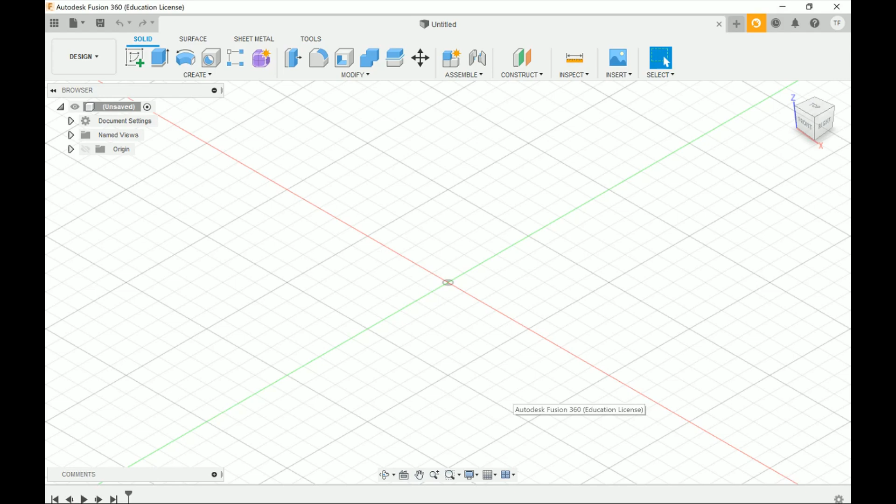We'll get right into it. So here's the blank sheet for Autodesk Fusion 360. This is how whenever you open it up, this is the start out screen. So this is what I use to design basically about anything I'm making, and then I convert it, manufacture the G code, an NC file, and I put the G code into the Candle program, and then it goes straight into the machine. So I run everything off my laptop.

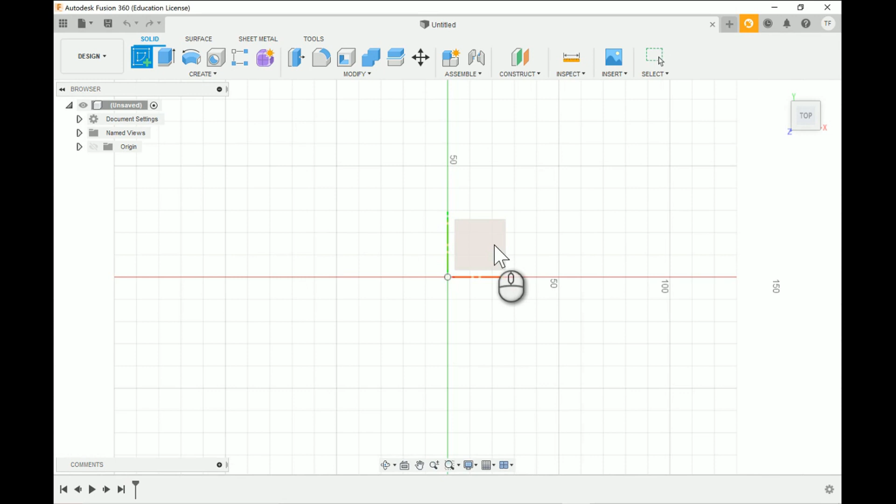So what I normally do, I'll start out over here in a top view, and then I'll go over here and create my sketch. Whenever you hit create sketch, you have to point out which plane you're going to be in, so I use this top plane, and then you're right into your sketch palette. You can do just about anything in the sketch palette.

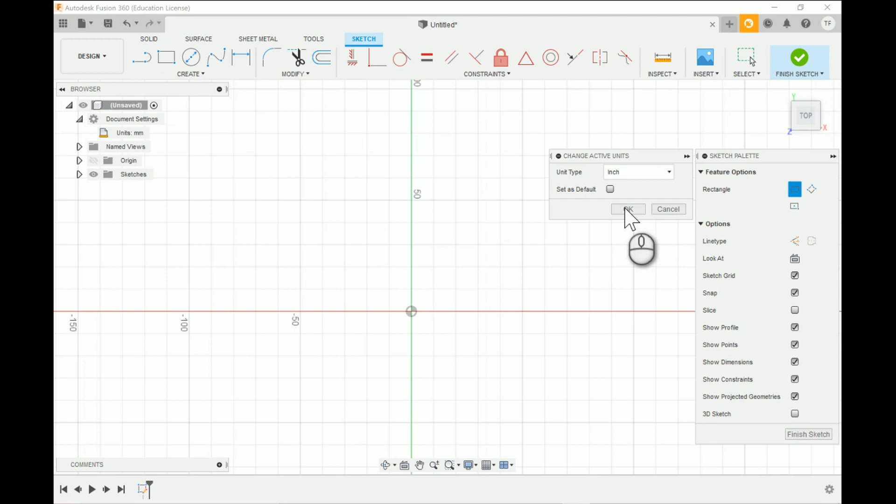In the document settings, you can use the units. There's all sorts of units, you can do all of these. A lot of times I do millimeters and inches. We'll set inches as our standard for now.

So we can create a rectangle here. I'll start out here in the main axis, and then we'll just make a 2 by 4.5, I guess. Okay, so now we have a rectangle, and what we want to do is make this into a shape.

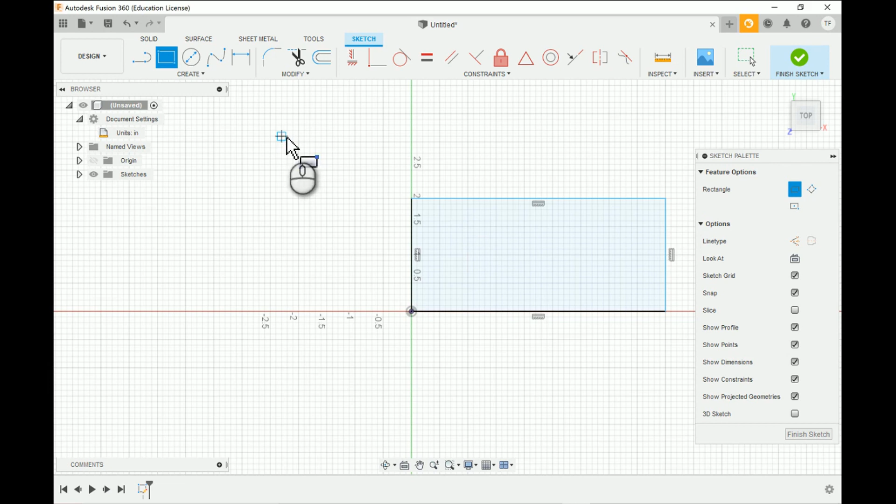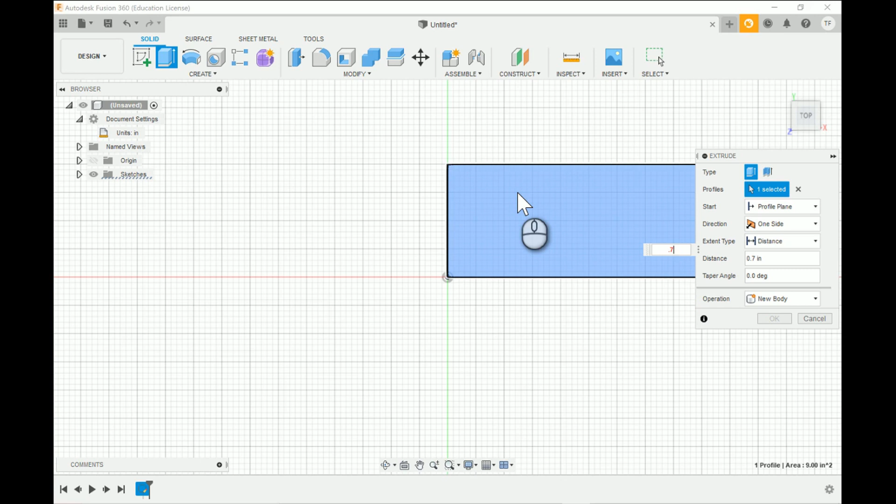So we'll go over here to solid, and we'll extrude this shape. Basically what that does is it stretches it out and makes it an actual object. So let's go 3/4 of an inch, 0.75, and then hit enter, and then we should now have a fully rectangle cube.

So we'll go back here to the top. Now let's say we wanted to drill a couple holes in this block. We'll create another sketch, click on the top plane, and now we are sketching on the top surface of this object.

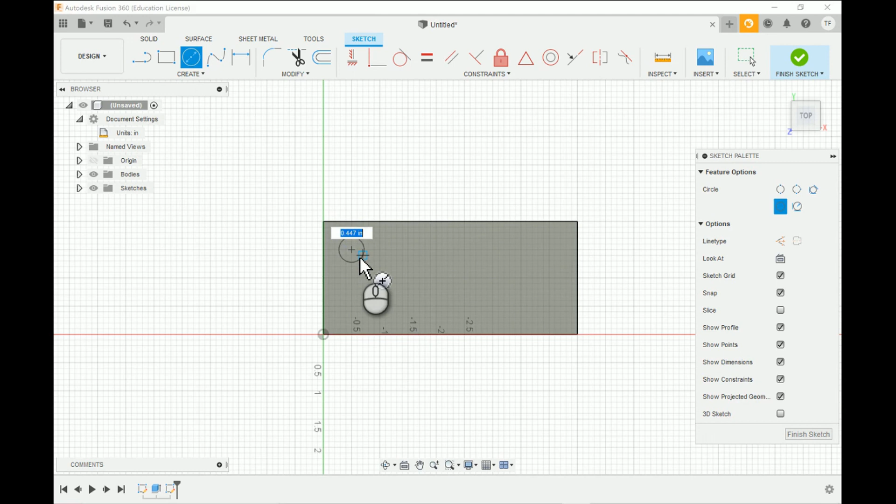So we can take a circle, put it at whatever point we want to, let's go here. Then we can go with a 1/2 inch hole. So now we have just a flat 1/2 inch circle, there's no hole, there's just a circle right now. So we'll escape there, and then we'll go back to our top.

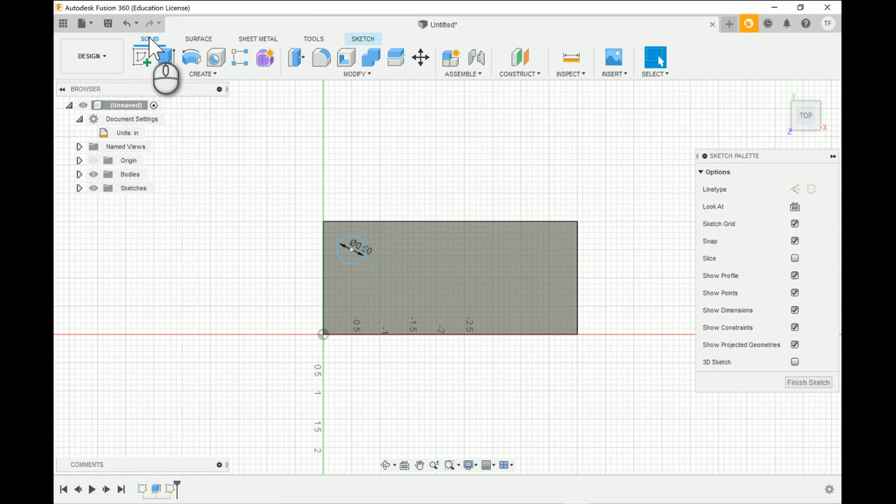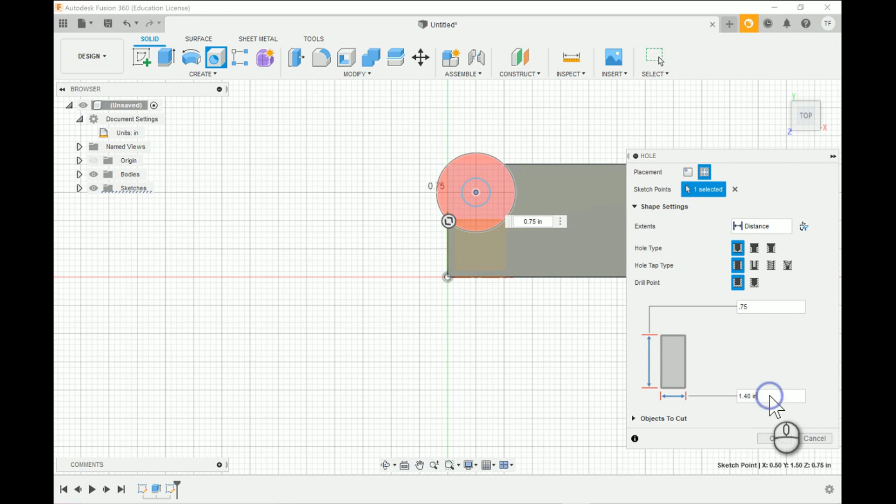To make a hole, go back over here to solid, and then we hit the hole function. Now that we have the hole function selected, we can go over here and select our holes, so we'll click on that one. There's all sorts of different types of drill points and everything, so we'll go with just a normal hole, and instead of a rounded, we'll go with a flat bottom hole. Let's say we want to go all the way through the material, so we'll do the same depth as our material, and make sure our hole is a 1/2 inch, just like the circle we drew, then hit OK, and there's your hole completely through the object.

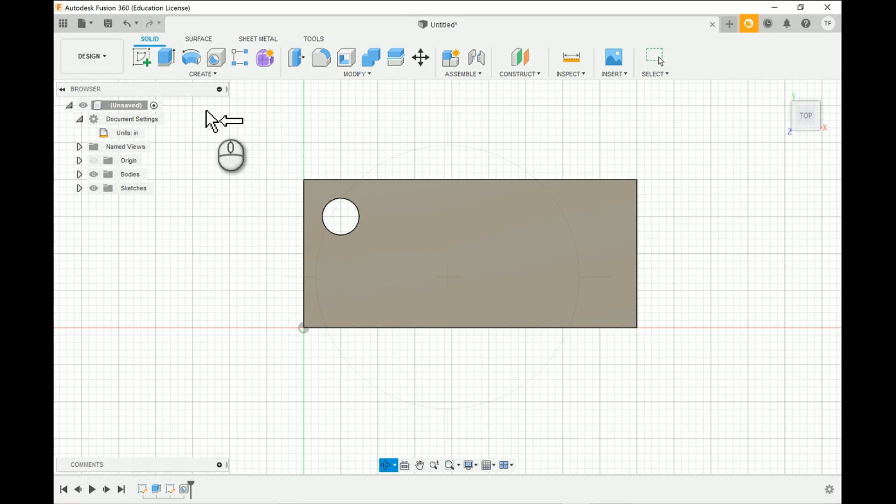Okay, so now if we want to go, say we didn't want to have a hole all the way through, say we would rather just have a partial hole, we can make another one here. And then once again we do the same thing, and this time let's only go 1/4 inch in. We got all of our settings the same, so we hit OK. Now we only have a partial hole.

So, many different ways to do many different things on here. That's what I do for a lot of my game boards and things that I make. Do shallow depth holes and things.

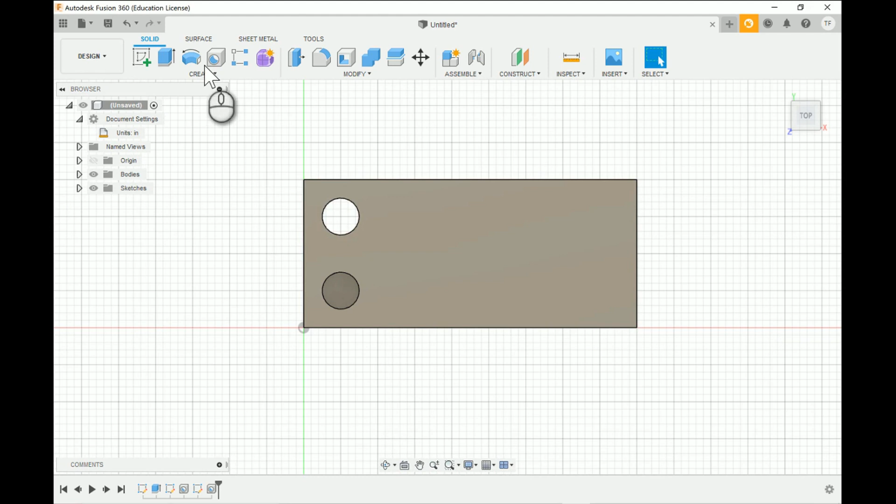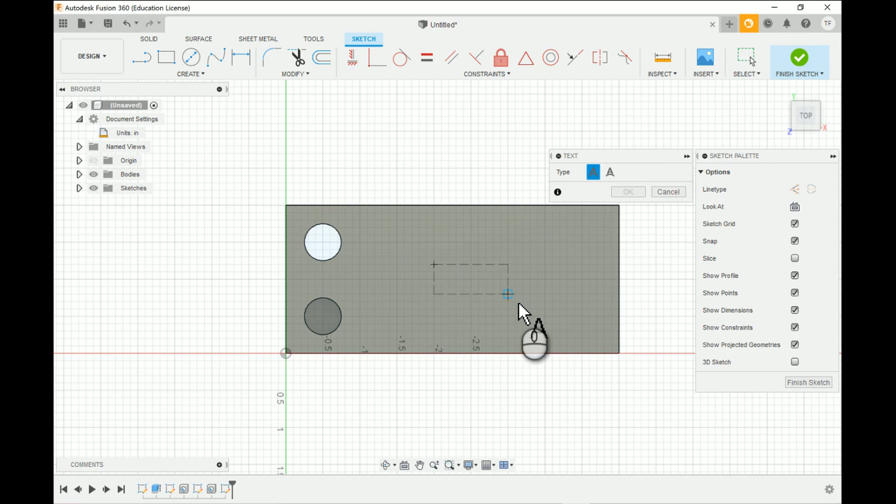In sketching, you can also do text. So if you like to engrave stuff, if you want to cut a big old rectangle out or shapes or whatever you want. So if we wanted to engrave text, we can just make a text box here. So then we can just put whatever in here.

And then there's tons of fonts. I do know there are ways to insert your own fonts. You can download fonts off the internet and put them into the program as well. There's different types of fonts, certain fonts for different things, but we'll just go with the normal font for now. You can create the height, you can bold it, you can do about anything with it.

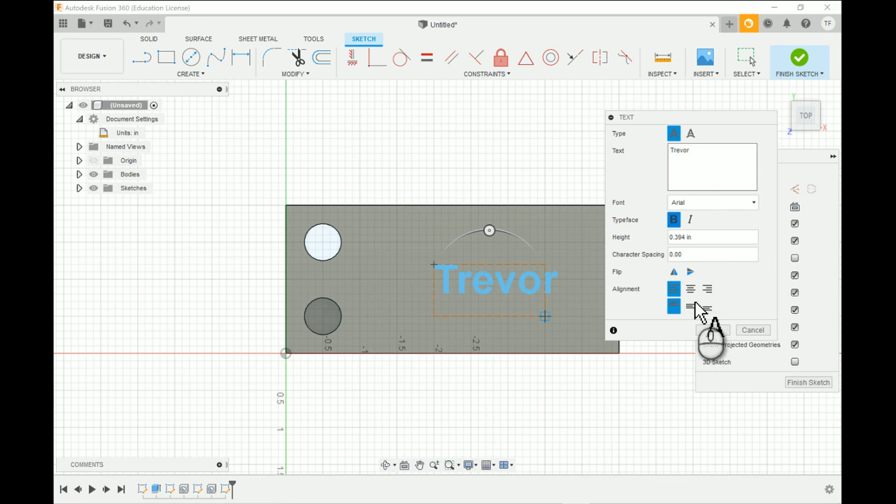So say we want to engrave. I guess we can go straight into manufacturing. So whenever you have everything you want to manufacture all drawn up and everything, after you get your design finished, you go over here to manufacture.

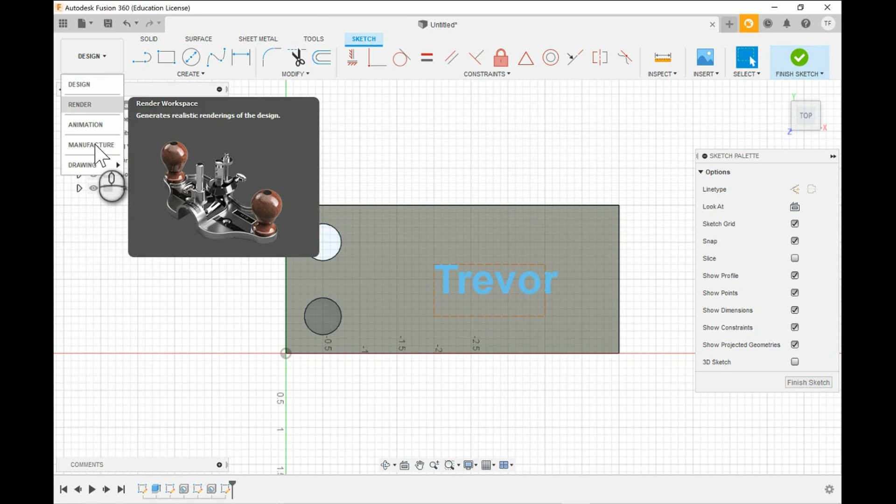And manufacture, you also have different units and things, different ways to cut. Most of the stuff that I do is 2D cutting and stuff. They also have 3D surfaces with lots of contours and things. Holes can be drilled using these drilling functions. Got smart hole recognition, different things like that.

For cutting and stuff, a lot of times I use like a 2D pocket, slotting, tracing. For text, I do engraving. So say we want to engrave, and we want to engrave just the letters. We go over here to our tool, and how I set up my tools, I create my own tools.

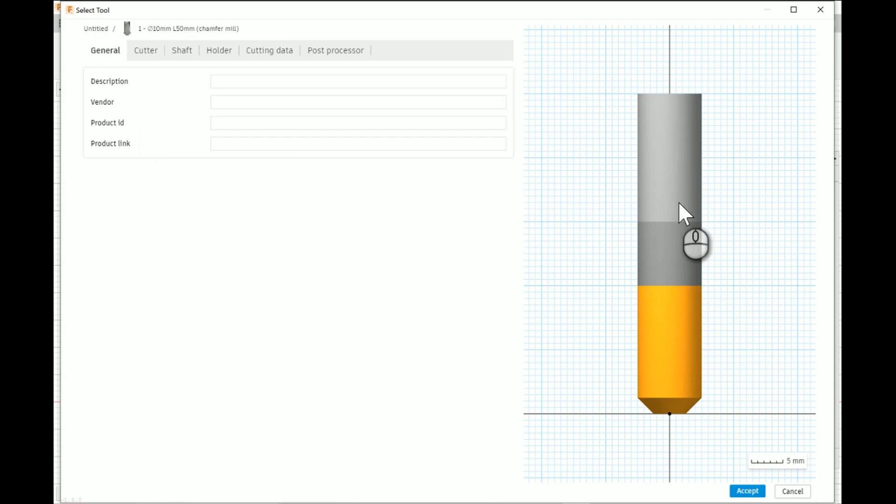So for a 30-degree V-bit, like the one that comes with the 300-watt spindle and stuff, they don't really have an exact tool preset in here for it. So what I do, I use a chamfer mill. So I set it up as a chamfer mill. This is what the stock chamfer mill looks like. So we'll edit the settings and stuff to make it look like our 30-degree V-bit.

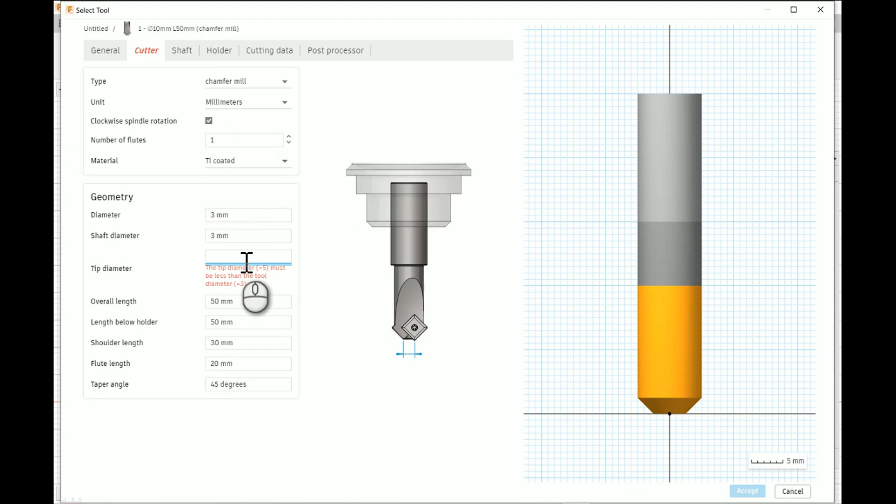So we'll go over here, we'll put one flute in. Material doesn't matter a whole lot, I just do Ti coated. The one with the machine is 3mm in diameter. Shaft diameter is the same. Tip diameter I put 0.01 in. Overall length, I can't quite remember, but I believe it was around 30mm. Length below holder, we'll go 15. Shoulder length 15. Flute length I believe was 6mm, and of course our angle is 30 degrees for the V-bit.

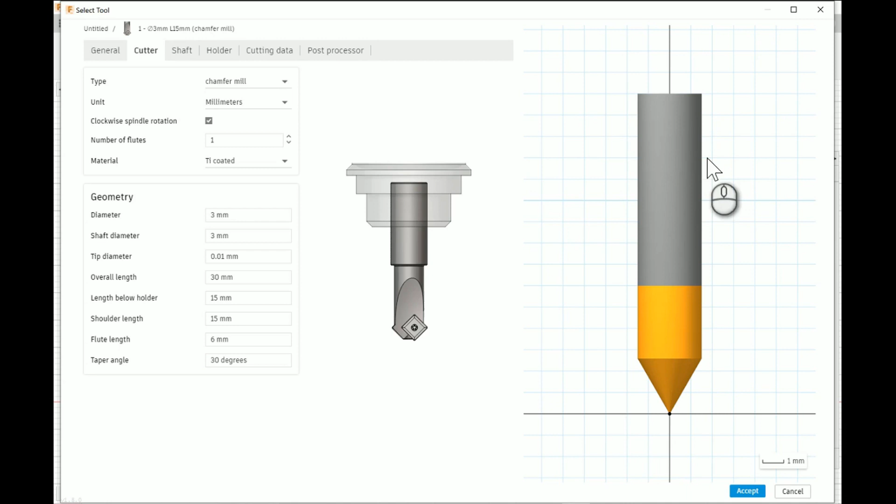So now you have your actual 30-degree V-bit, and this is what the program thinks it looks like, and it's plenty close enough to what the actual bit is.

So our cutting data, if you want the program to already know exactly what this tool can handle, you come over here and input the cutting data. For acrylic, I used 10,000 RPMs on the 300-watt spindle. I did a cutting rate of 1,000. My ramp feed rate, I slow it down to 300. My plunge, I do 300 as well. Obviously there's no coolant, so we'll come down here and disable that. And that's about it on the 30-degree V-bit.

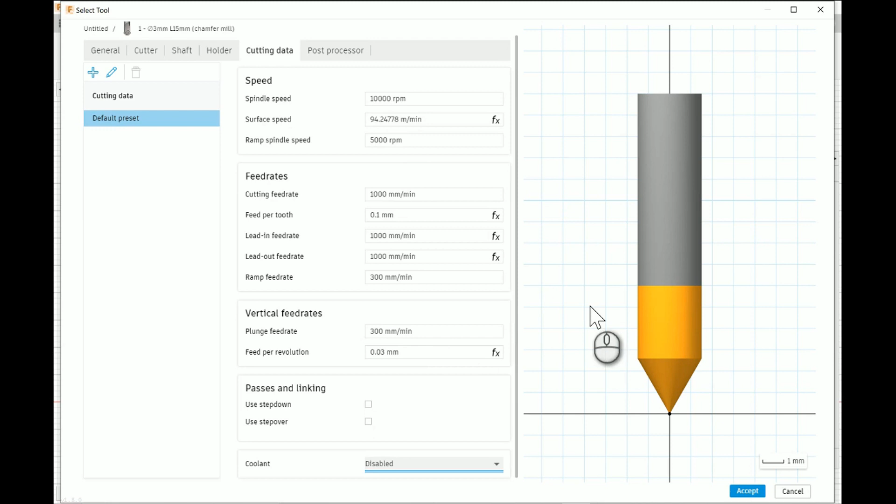So we'll go over here and we'll hit accept. And then here's our new tool. So we'll select that one. And then we'll come over here and you'll see the program already knows everything that this tool can handle. So it's already got the spindle speed, feed rates, and everything already preset over here.

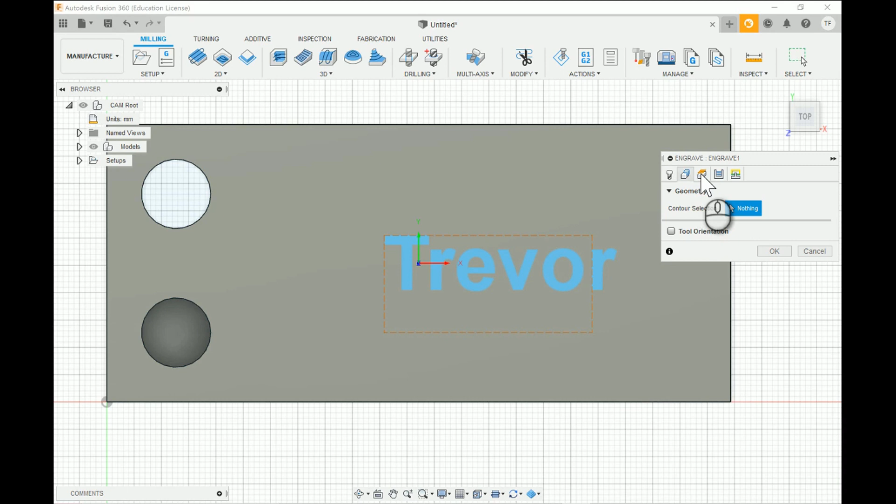So we go over here to geometry. We want to select our contours. So we select the lettering. So now it's got an outline of what's going to be engraved.

Clearance, that's a little bit of a tricky one for me. Depends on how high you want to, how deep you want to engrave your stuff. I have to play with that one a little bit, but you can see the different heights, the clearance heights, the retracting height, and all that. That's one that you kind of got to adjust depending on what you're engraving and all that.

And then it's good having multiple depths and stuff, depending on what you're engraving and things like that. Sometimes it's good to do multiple depths so you're not taking too much. But as far as engraving goes, most of the time you can get away with one depth a lot of times.

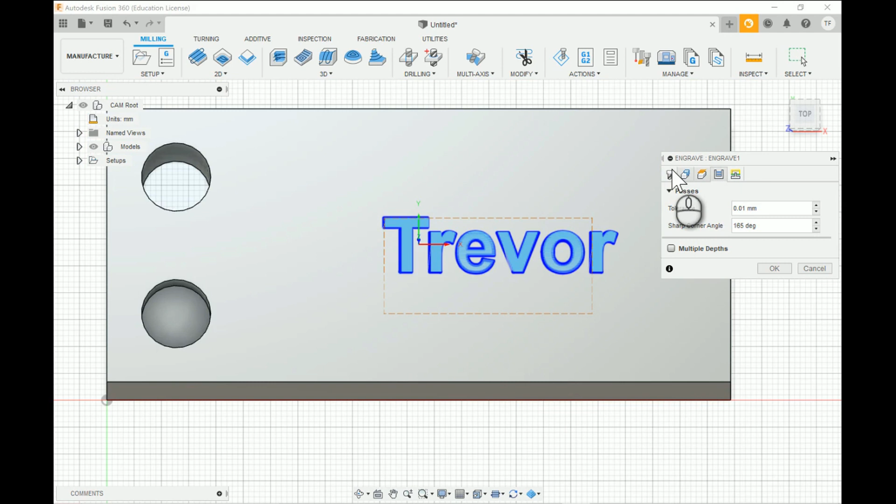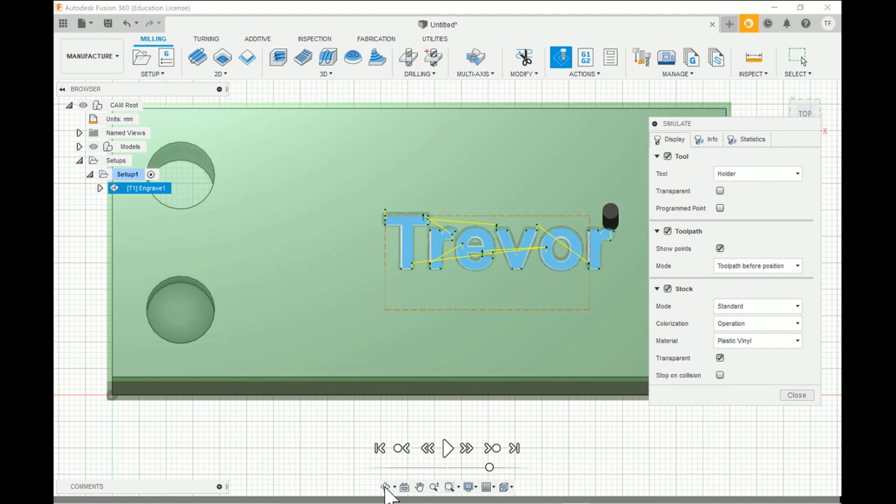So we'll have it set up, and then you can go over here and hit simulate, and then you can watch it engrave the entire thing. And that's about all there is to it as far as engraving goes. And you can kind of see a little bit of the 3D contour there, get a little depth perception there.

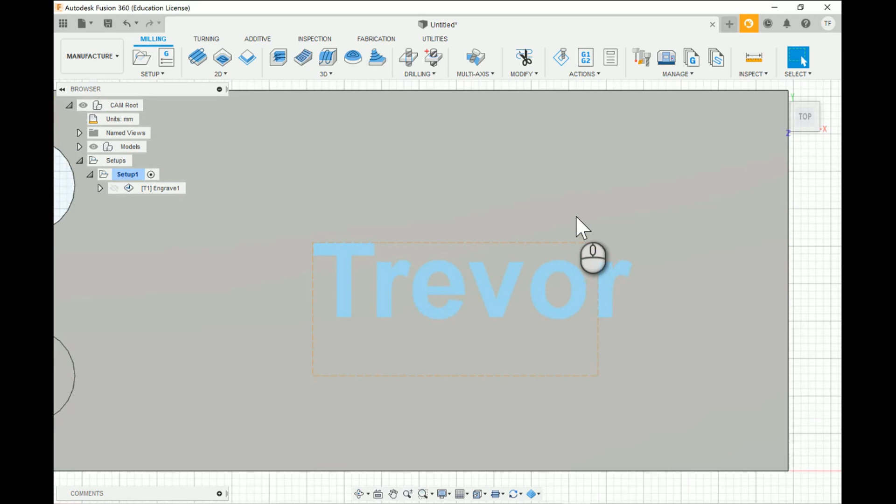As far as drilling holes, let me center this. So we'll go back over here to our holes. So one good thing about this program, they have a hole recognition function, so you can automatically recognize the holes, or you can go in here and select them manually. For the hole drilling, you can set up your own bit or whatever.

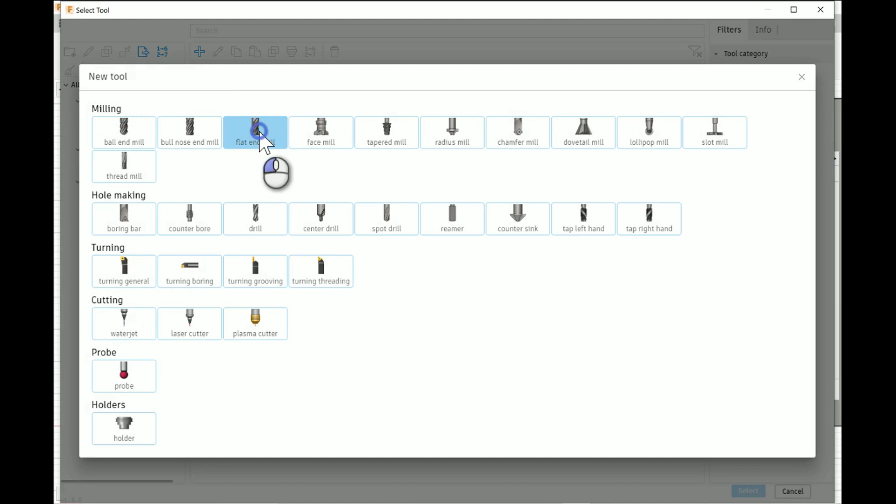I normally do mine with a flat end mill, well, depending on what you're trying to accomplish with it. My flat end mill on my DeWalt spindle, it's a 1/4 inch diameter shaft, and it's a 2-flute bit. It's a carbide. Diameter's 1/4 inch and whatnot.

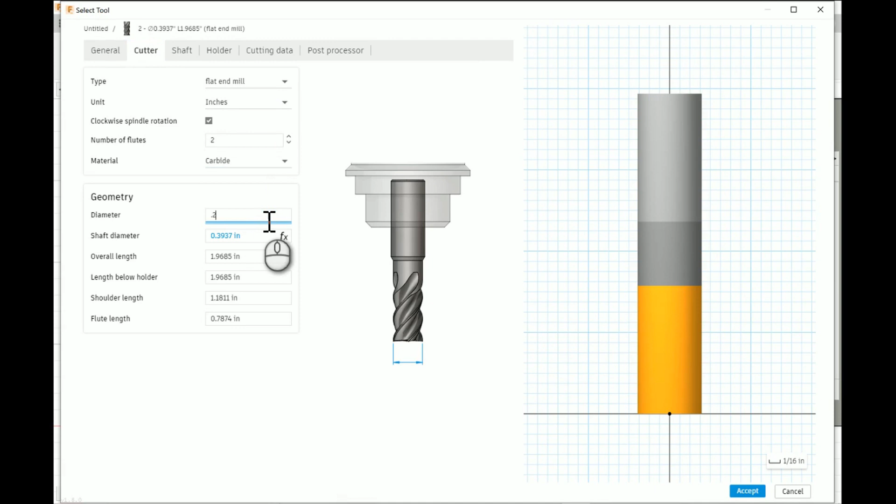Let's cancel this real quick. Let's go back over here. Let's set these units to inches instead. So we'll go back here. Let's recreate our tool here. I use the flat end mill. So mine have 2 flutes, carbide. So mine's 1/4 inch, 0.25. Shaft diameter 0.25.

My overall length's 3 inches. I'm not sure what my length below holder is. Let's just put 1.5. And then we'll just put 1 shoulder length. And we'll put 0.75 for the flute length. So there you have it. There's the flat end mill, 1/4 inch, 2 flute.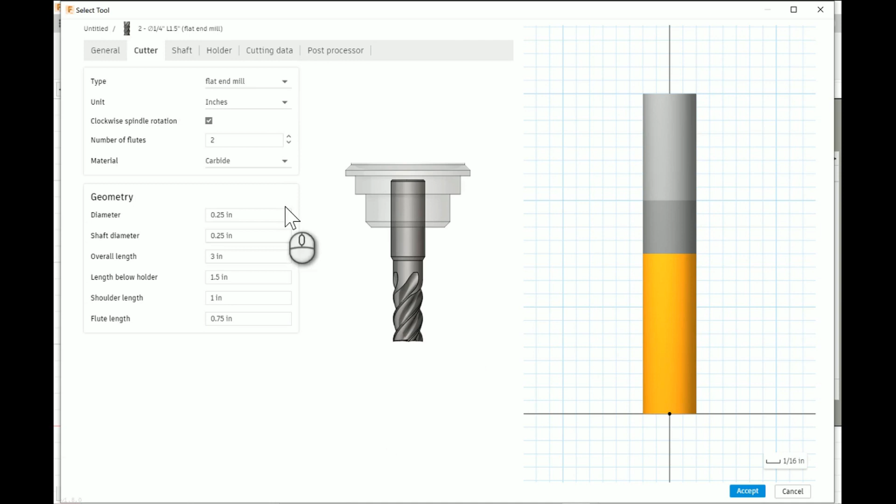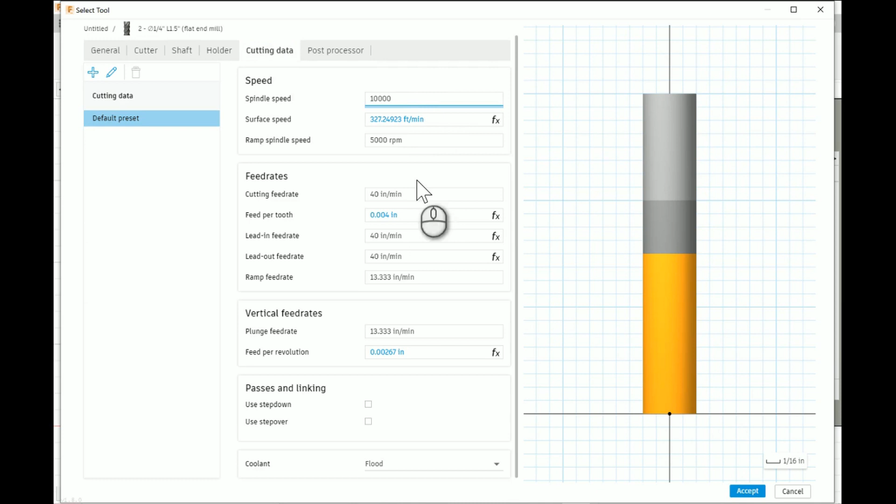I know a lot of the ones that come with the 300 watt spindle, they're much smaller. I use the DeWalt router that I got for an upgrade for the machine, so it uses 1/4 inch diameter bits. Cutting data on that, on the 300 watt spindle I use 10,000 RPMs. My cutting feed rate is usually 1,000 millimeters a minute, and then my ramp feed rate I do 300, and the plunge feed rate I do 300 as well.

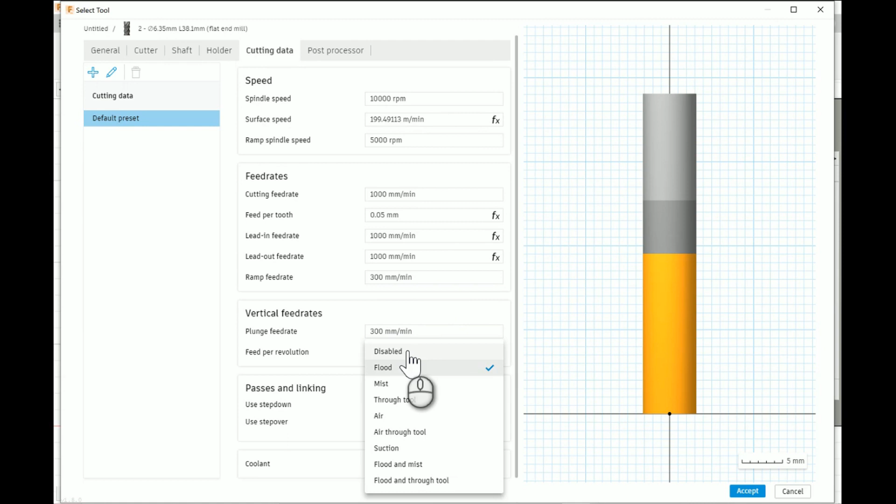So we got 10,000, so we go 1,000 here. We got 300, 300. And then of course there's no coolant on it as well. And so there's your flat end mill if we're drilling this 1/2 inch hole. So we select that. And then spindle speed, plunge rates, and all that are already preset.

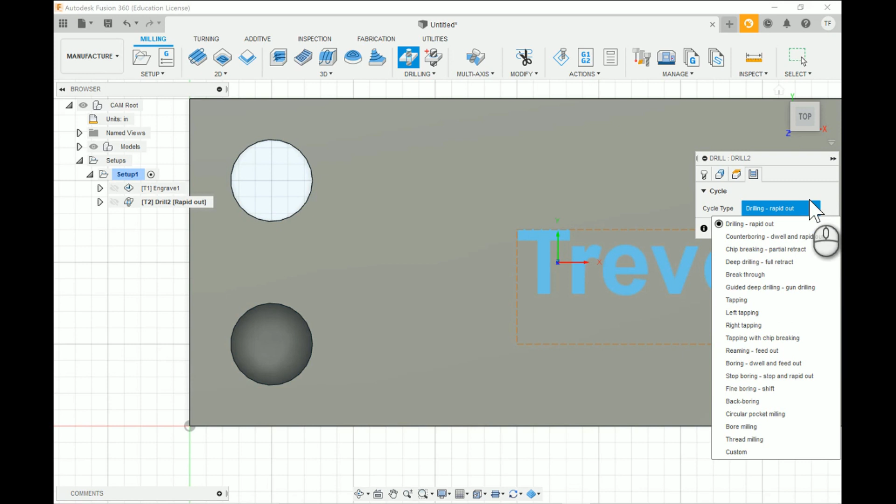You can do multiple heights. You can do several different cut types. You can bore, thread, you can have a tap drill, all sorts of things. A lot of times I do a boring type drilling, where it spins around and around and slowly goes downwards in a spiral.

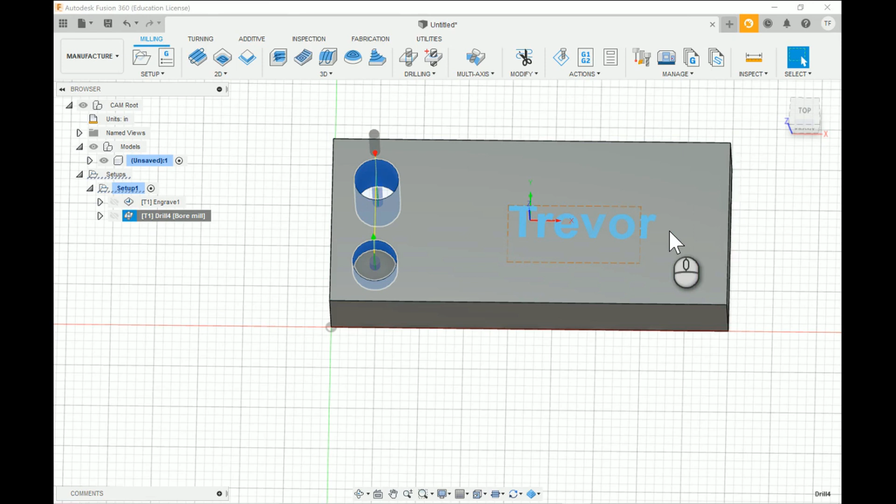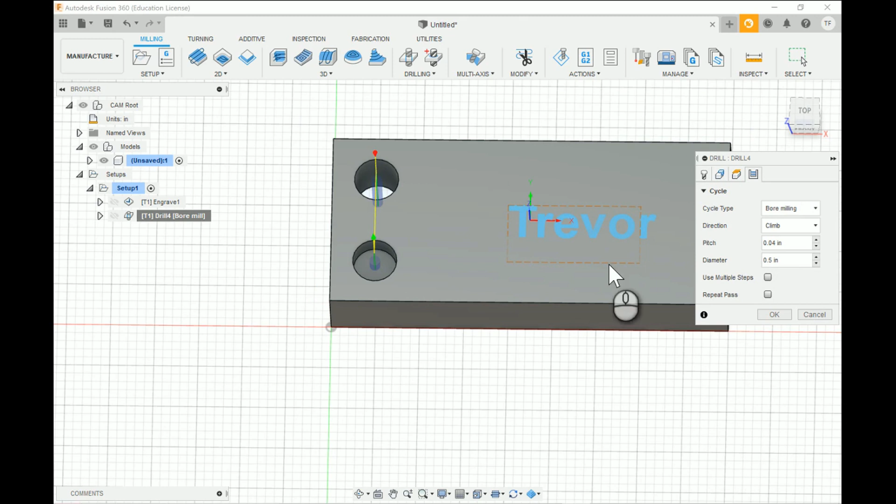Okay, so for the drilling part. So we'll go over here. We got our 2 hole faces selected. We have our tool. Our spindle speed's already preset through the tool. Plunge rate, ramp feed rate, everything's already preset. Clearance and everything's all set. So we're going to go with bore milling. Our diameter is going to be the same as our hole. So we're going to have 2 1/2 inch holes. And we should be good to go.

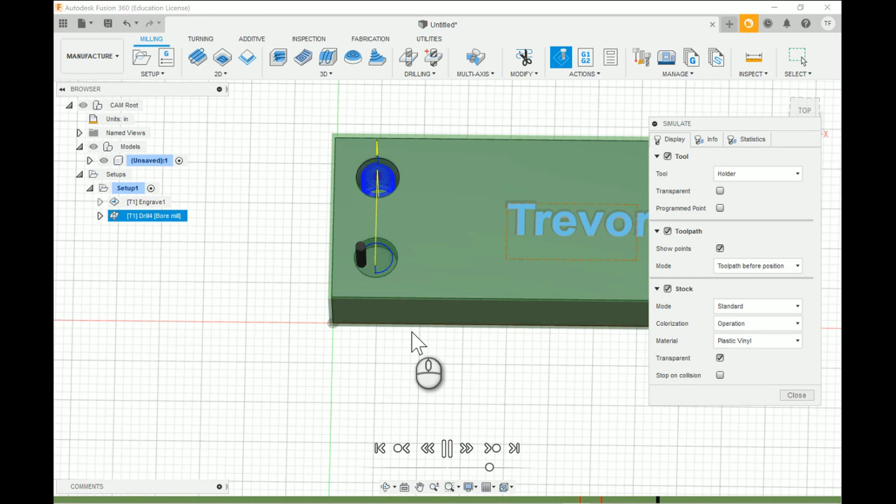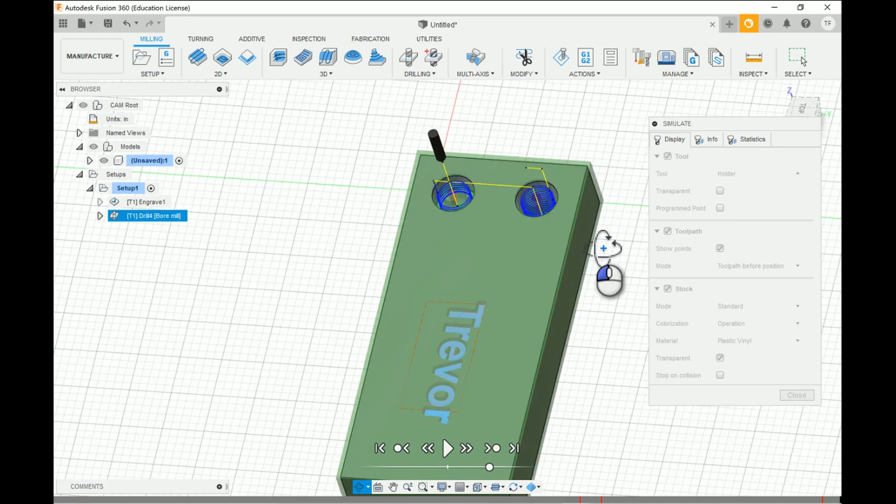So here it is in simulation. We'll go up here to simulate. Double check our work. We'll hit the play button. By the end of this, we should have 2 nice 1/2 inch holes that have been bored out through the bottom. And there we have it. So now you can see the tool path for each one. They go round and round all the way down to reach the bottom. We only put this one 1/4 inch in, and then we went all the way through on this one. There we have it.

Through this program, there's many different things to do other than just this. This is just a couple simple things that I typically do on a lot of projects. I drill lots of holes, I do a lot of engraving. Hope this helps you guys get started. I know just even little bits of information can help.

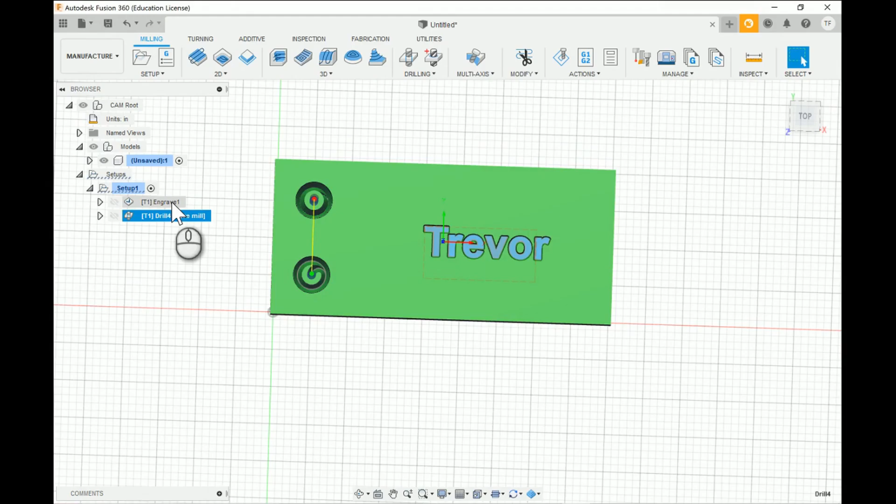Now that we have our two manufacturing processes set up, we'll go over here and create an NC file to send over to our machine, to send over to Candle, and our post processor can generate the G-code. So we'll right click on setup 1 here, which includes everything we just did, the engraving, drilling the holes, and it'll do all this in order.

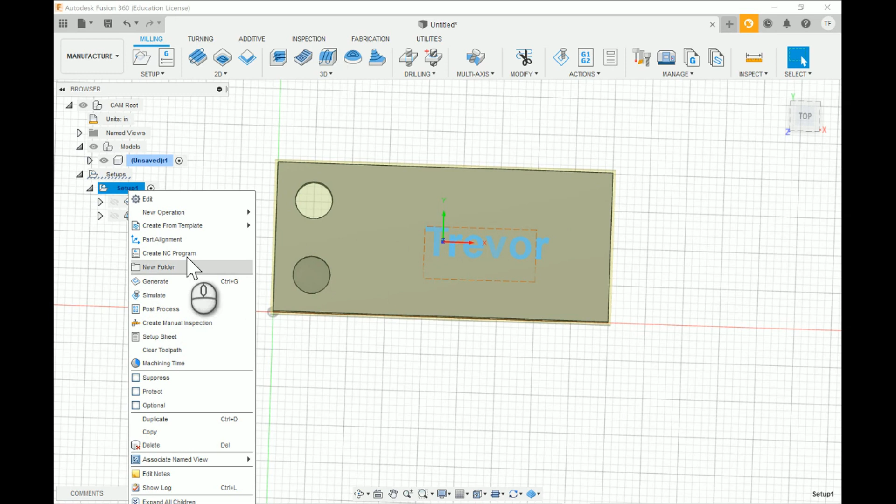For example, if you have something with writing on it and then you also have to cut it out, a lot of times it's better to have your writing first and then cut it out, so you're not running into problems. There's also ways to set up tabs and all sorts of things. But one problem you might run into is if you cut it out first, your part might move before you get it engraved. So we'll right click on the setup, create our NC program, and we'll just name it block 1.

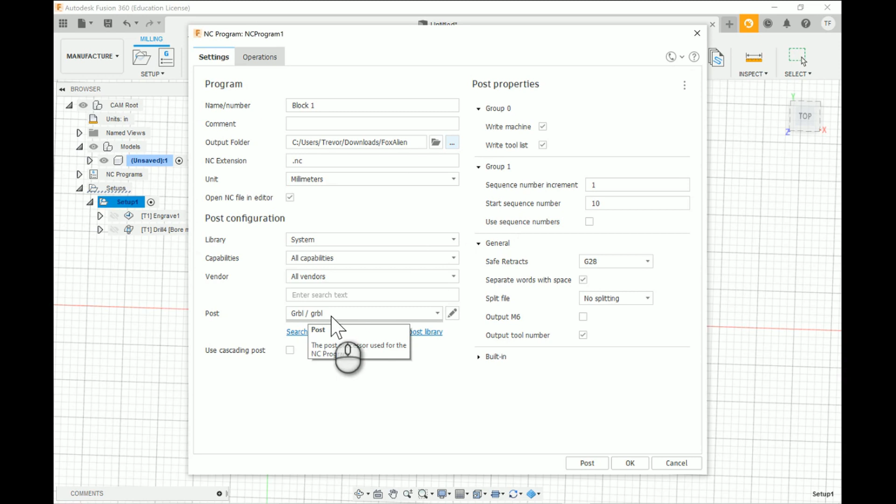And then you want to put it wherever you're wanting to take it, your output. So I put mine in this FoxAlien folder here. You want to make sure it's an NC extension. Units you want in millimeters. Everything else should already be set up. Make sure this is set to GRBL, and then should be good to go other than that.

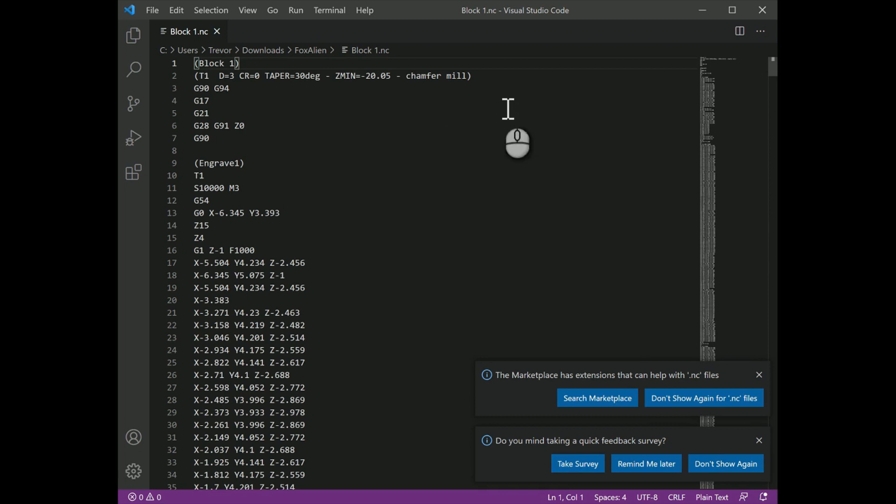And then we'll go over here, we'll hit post. So the NC code was successful. That brings up the Visual Studio. So now here's all of our lines of G-code. And on this particular program, we have 743 lines of G-code. So there's lots and lots of G-code. It goes into even just something as simple as just this block with some lettering and stuff on it.

Okay, in this section of the video, we're going to go over a few key things to make your machine run right before you start. Whenever you first get this thing out of the box, you want to go through every single bolt on this whole thing, every single thing, so that they're all tight, nothing comes out, you don't have to worry about anything. Also, another important thing to check on is your stop switches. Make sure that these bars right here aren't bent, so that whenever they come up to their point, they'll stop the machine in its place.

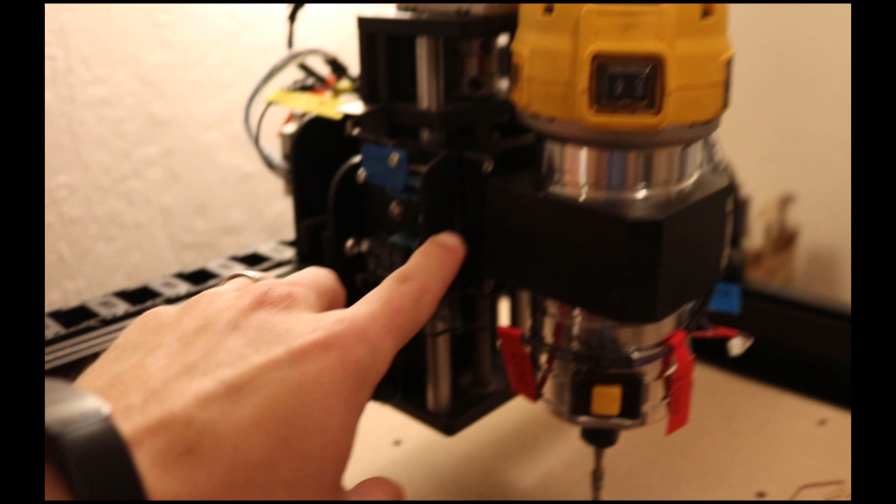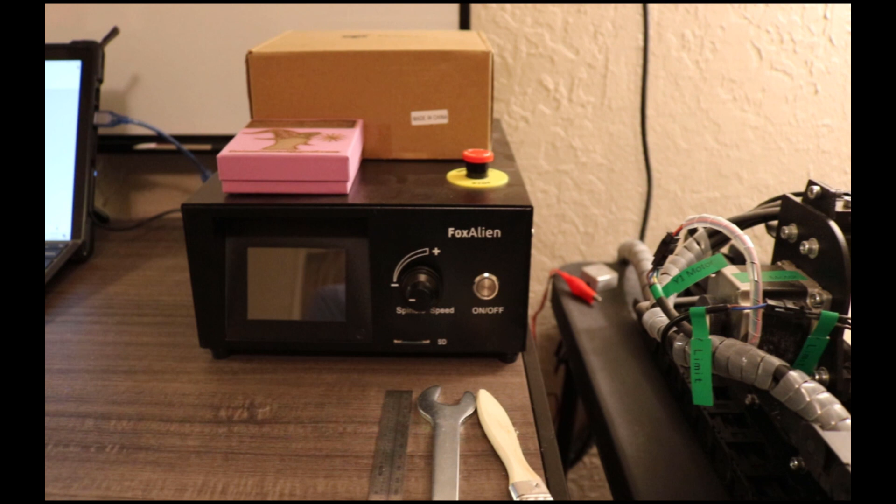I know, like on mine, I have the DeWalt router, so these bolts here, I have a little bit of Loctite on each of those to help keep the shaking out and to help those not back out. I just use a medium strength Loctite. I know a few things that happens quite often is like mine, whenever I first got it, the emergency stop was pressed down. So for firing up your machine, make sure that is released and pulled up.

Also, I see this all the time. There is a switch over here on the side of the control box, and so if you're like me, I run it on my laptop. So make sure this is switched over to computer mode instead of controller mode. And when that is, this touchscreen right here on the front of the control box should be off, and then you won't have a bunch of problems. I know whenever I first had it, I forgot to do that, and I had a lot of issues with my parts skipping around and the tool paths weren't cutting right.

And then also another thing to make sure on these belt tensioning deals and stuff, make sure all of these set screws are tight and then your belts are tensioned right. That's very important for your machine to run smoothly without skipping around and jolting around like it shouldn't. And make sure all your wires are connected correctly and all that, and you should be good to go.

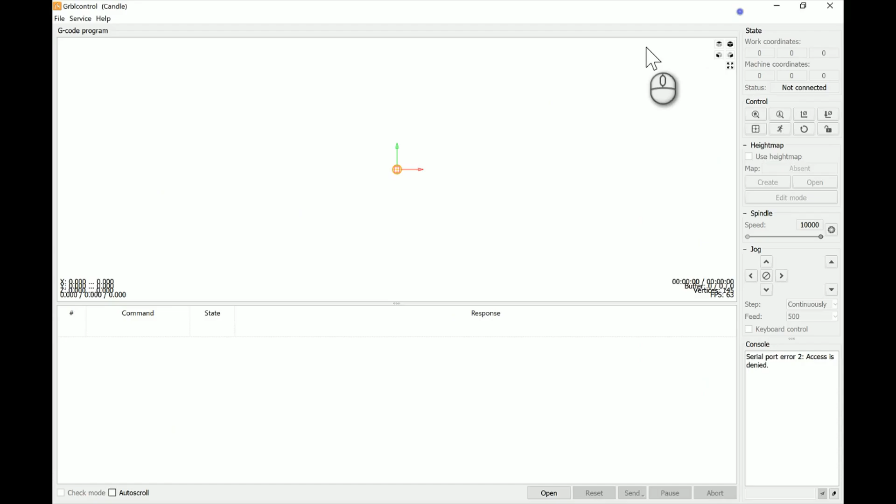Okay, we are gonna open up Candle now. So we'll go to our FoxAlien folder. I'm on Windows. Go over here to the software, Candle, and here's our application. The first time opening, you'll have to extract all the files. And here's mine opened up. So to connect this to the machine, you want to plug in your USB and then make sure your controller box is switched to computer mode, and the switch is located on the left side of the controller box. And then we want to turn on our machine,

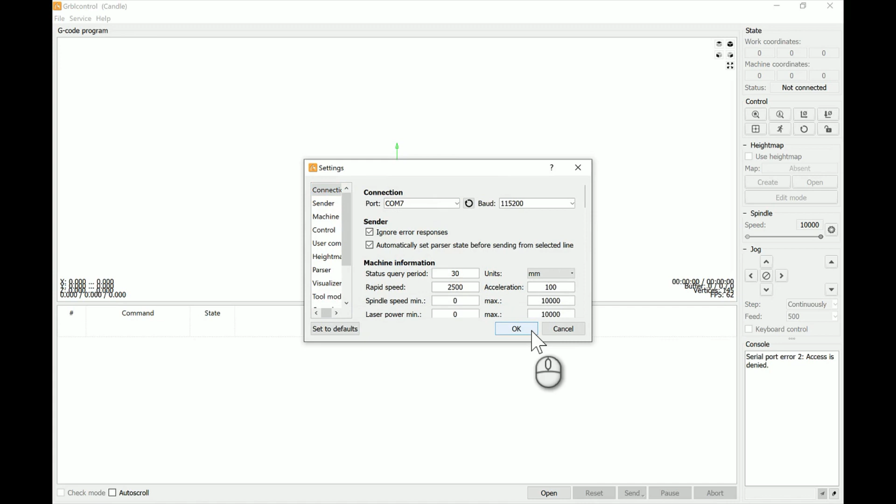and then we'll go up here to settings, and then you're going to find your COM port. On mine is COM 7. I use Surface Pro 6. Sometimes you might have to unplug your USB and plug it back in. And then now it's saying it's ready and connected to my machine, since the alarm's popped up. So to reset the alarm, we want to hit reset and unlock, and then now it is in the idle state.

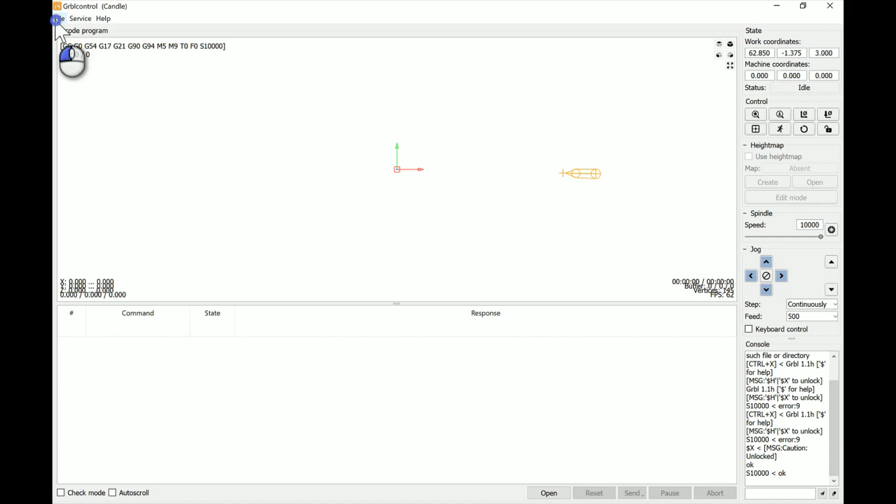So now we want to insert our NC file, so we'll go over here and we'll hit open. We'll find which NC file we want to go with, and then this is just one I created for a project I did. And so here's my part. I created Joker game boards. I even have it where it's got tabs, to where when I cut it out, it leaves tabs behind, holds the part in there, and then should be good to go.

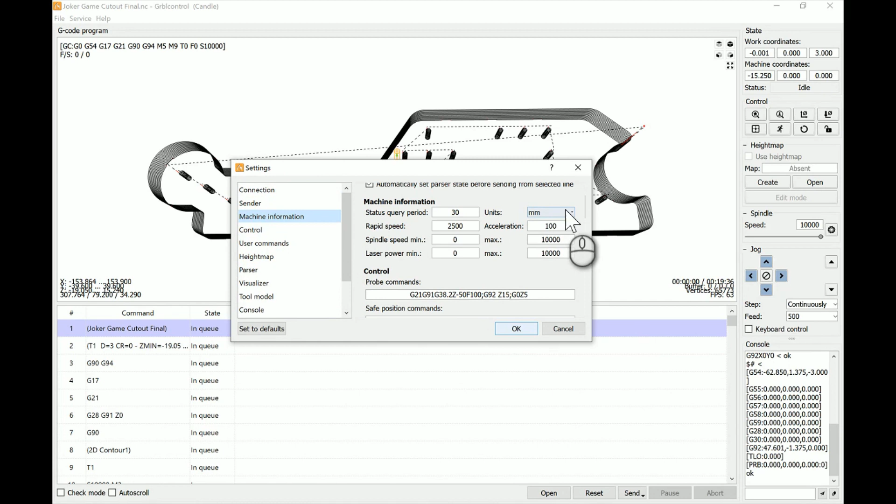So to use your Z probe, you want to line up your X and Y first, and then you'll come over here and then you'll zero your X and Y, and then you want to hook up your Z probe, and then you use this. And your Z probe is 15 millimeters thick. Here's your Z probe. So it's already set to 15, and it's in millimeters. So whenever you use that, it automatically knows that your block on your Z probe is 15 millimeters thick. So when you use that, it'll automatically put you precisely where you need to be.

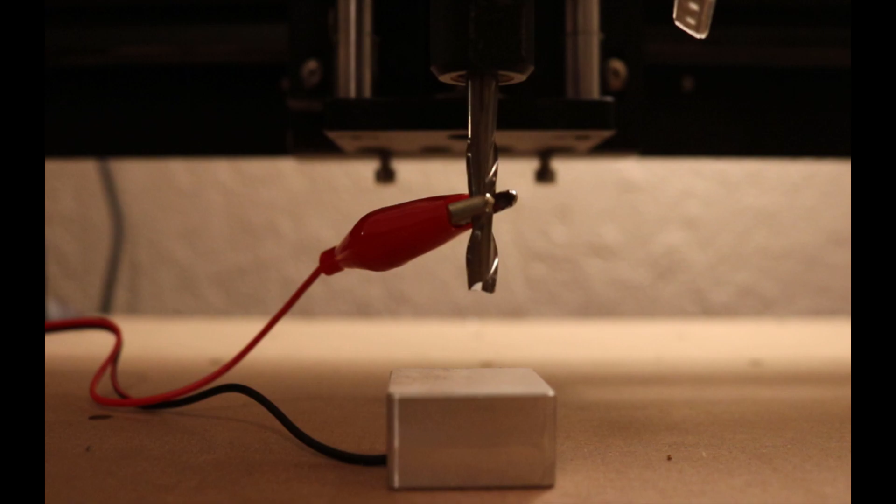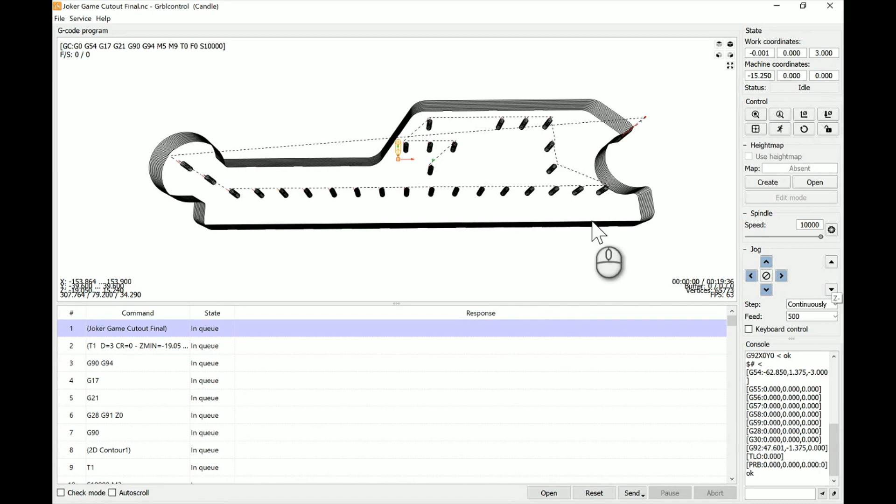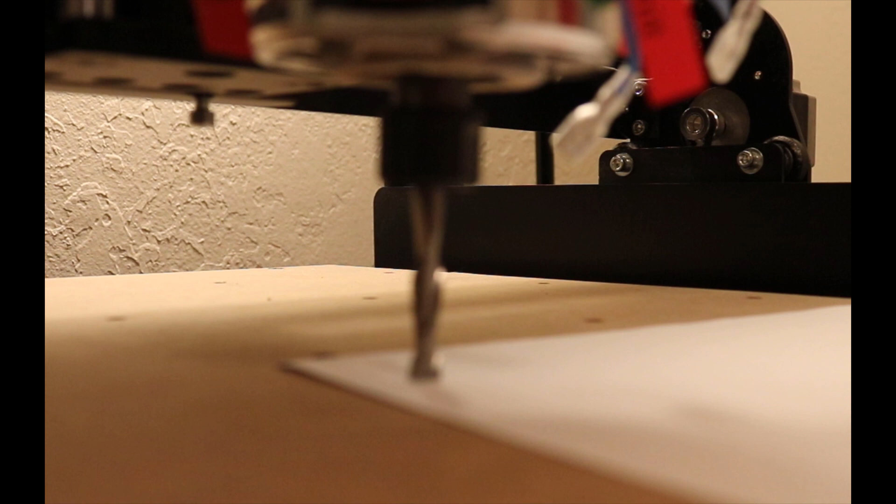Or you can use the old-fashioned way and put a piece of paper in between, and then you jog your Z-axis down until you have that piece of paper just snug in between your cutter and your part. That's also another way to do it, if you'd rather do that instead of hooking your Z-probe up.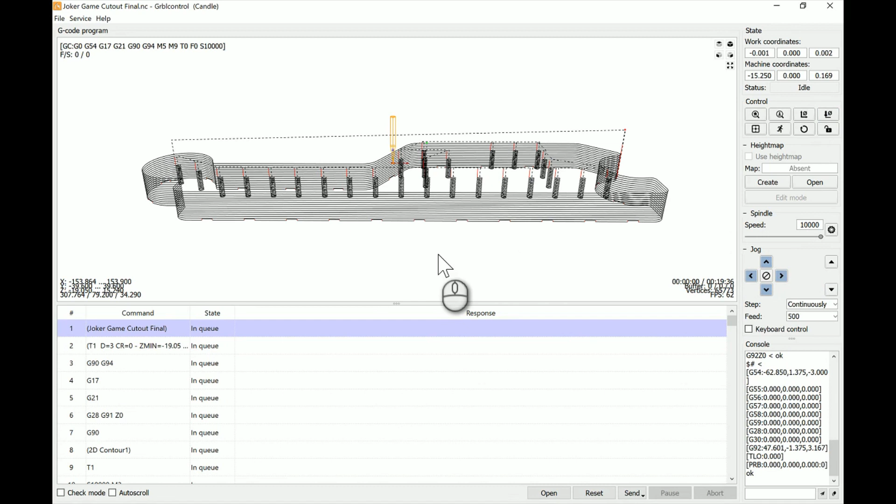And then once we get it all lined up and correct, we zero it in, and then we go down here and we hit send and let it rip. And then if you want to pause in the middle, if there's something you need to pause for, you just hit the pause button. If you need to abort the whole process, just hit abort.

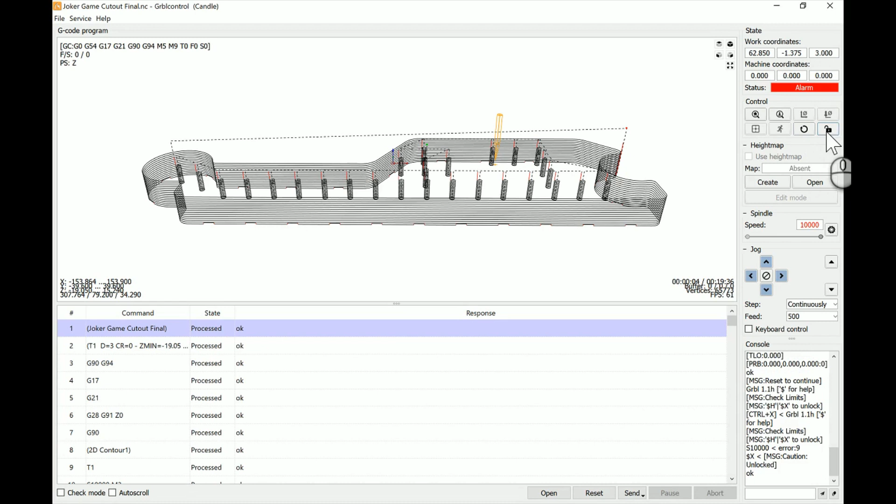And if something goes wrong, remember you always have your emergency stop to hit on the top of your control box, and that'll stop the machine in its tracks. And then also, when you use that and you release it, it's also going to set that alarm off. So you release the emergency stop button by twisting it and pulling it up, and then you just come back in here, you hit reset and unlock, and you're back in your idle state, ready to go again.

Alright guys, I want to show you something that's really cool with Candle. Not a whole lot of people will probably know about this. Sometimes on your machine your spoil board is a little off. So what a lot of people do, they create a file and they cut their entire spoil board down so that when they set a part on there and cut, their cuts turn out nice and flat and straight like they're supposed to be. But I'll show you guys a way that you don't have to do that.

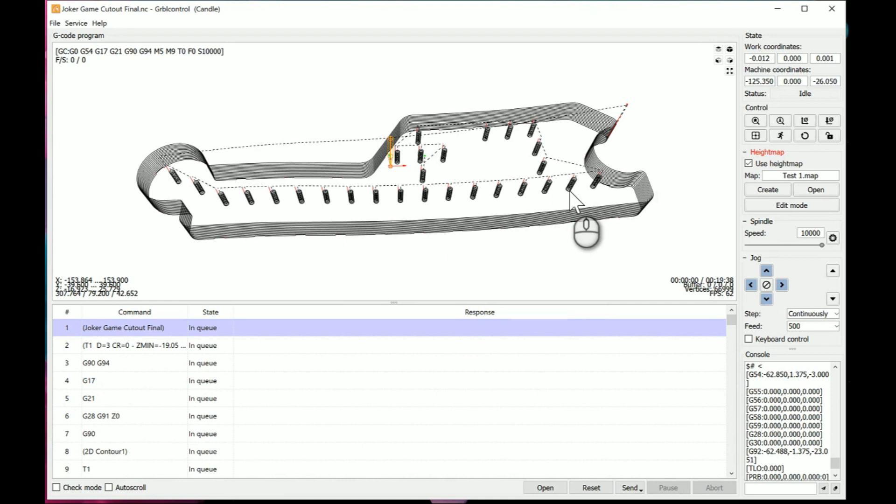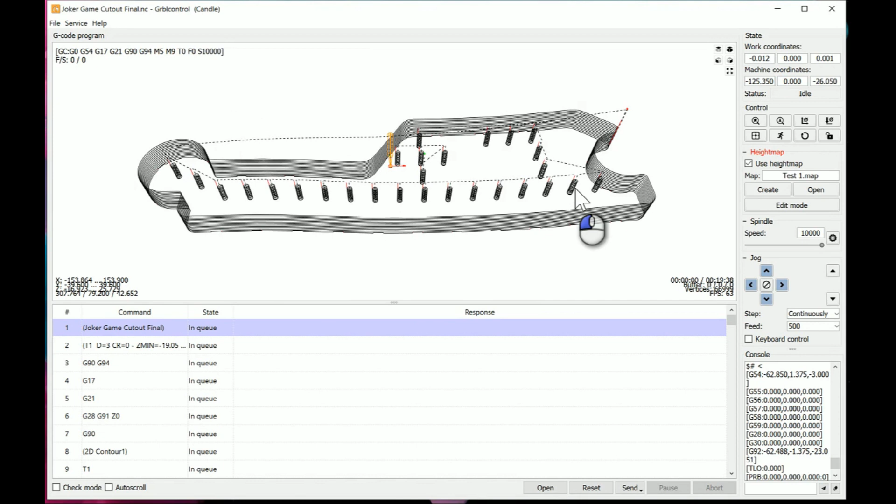And Candle has a really cool thing, and it's called a Heightmap. So basically what it does, it reads all of the curves in your spoil board, and you don't have to sit there and cut your spoil board apart, because doing that will also mess with putting, say, a bigger part in there that uses the entire spoil board. Well, your machine can't cut the whole spoil board, so essentially if you cut only the half and you put a bigger part in there, it's going to be off anyway. But with the Heightmap, you don't have to worry about that.

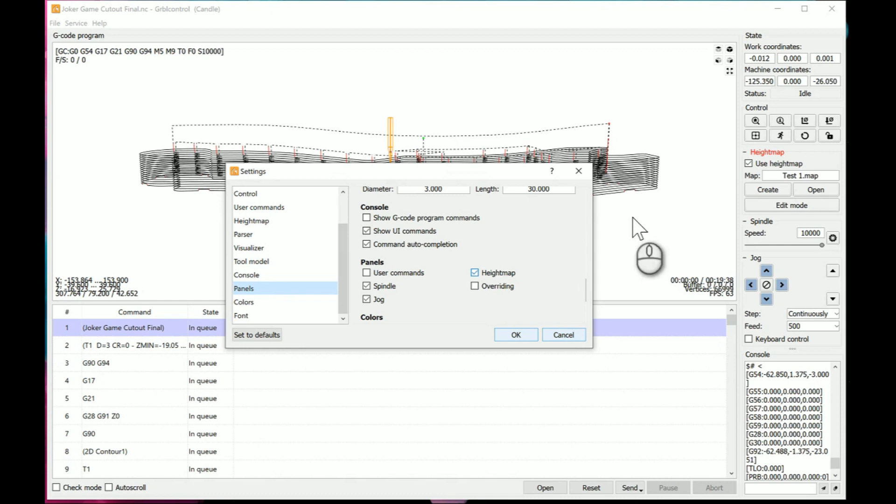So what you want to do, you want to go over here to your settings. Okay, you want to scroll down to panels, and then you want to click this Heightmap. So then you get this tab over here, and then you can use a Heightmap, which will be unclicked when you first do it. So see, now it's just nice and flat. But if your spoil board's got a curve in it, or say mine's higher on one end than it is the other, I can make a slant on the Heightmap to make up for that slant on my spoil board.

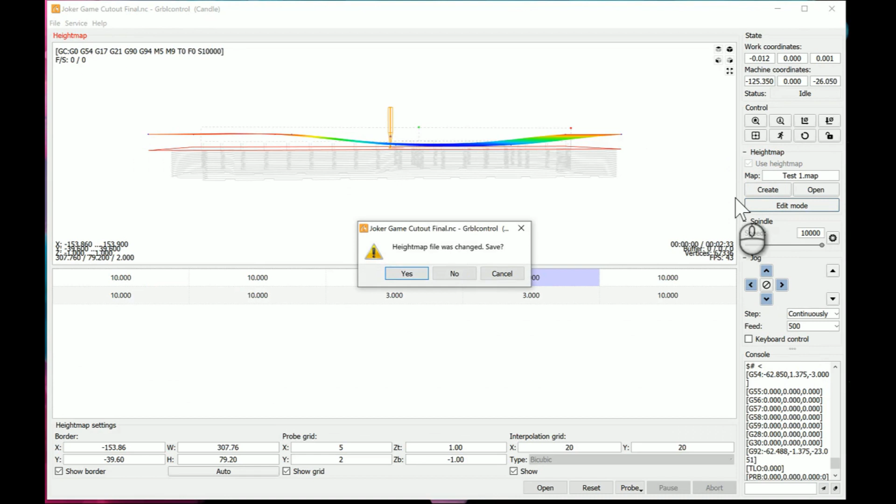So I just kind of did a test here. You can see mine. It's got a big dip in the middle of the spoil board, but I made this one really obvious so you guys could see it easier and know what I'm talking about. You can see the difference there. So what you want to do, you want to do this here, and then you can set as many of these probes as you want. If you already have a part here, it also has this auto function where it automatically tells you what the perimeter is all the way around it.

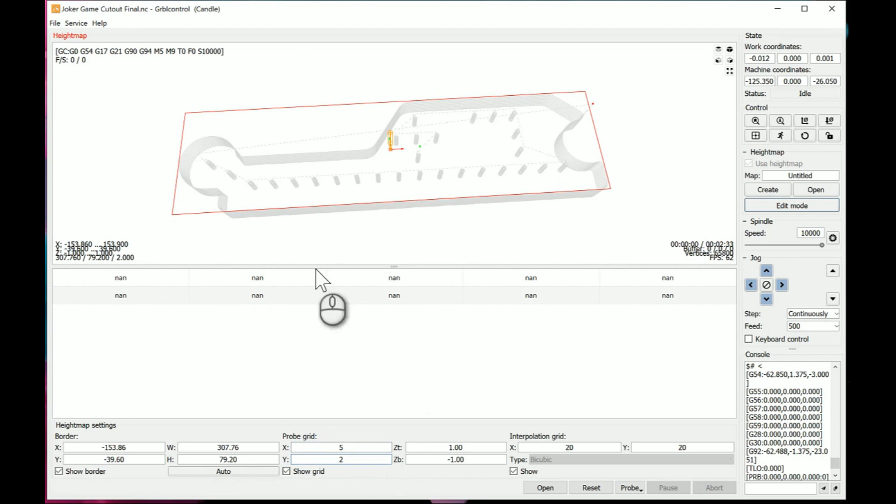And then you can create your grid here, and we'll just put a bunch of random numbers in here so you guys can see what I'm talking about. Let's say I got a dip here in the middle. Go 8 like that. So if you look, then it comes down here. It has that nice curve to it, so it makes up for that in your spoil board. And you can set as many of these as you want if your spoil board's all messed up or whatever.

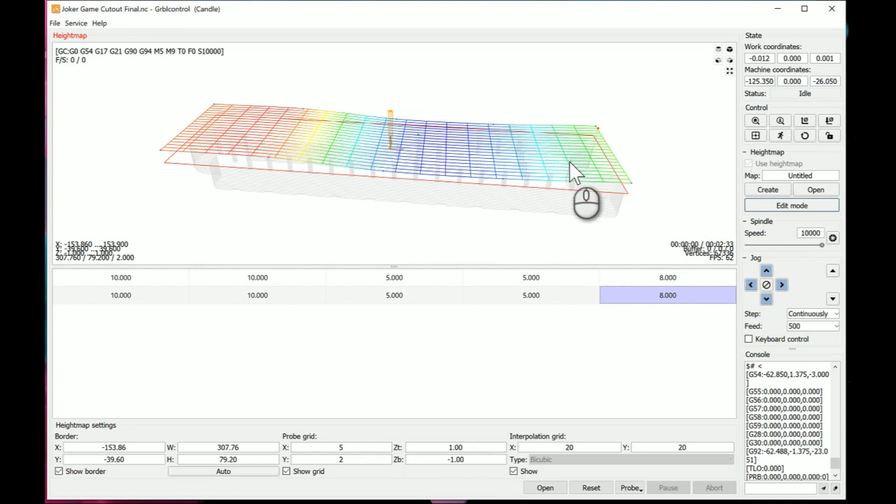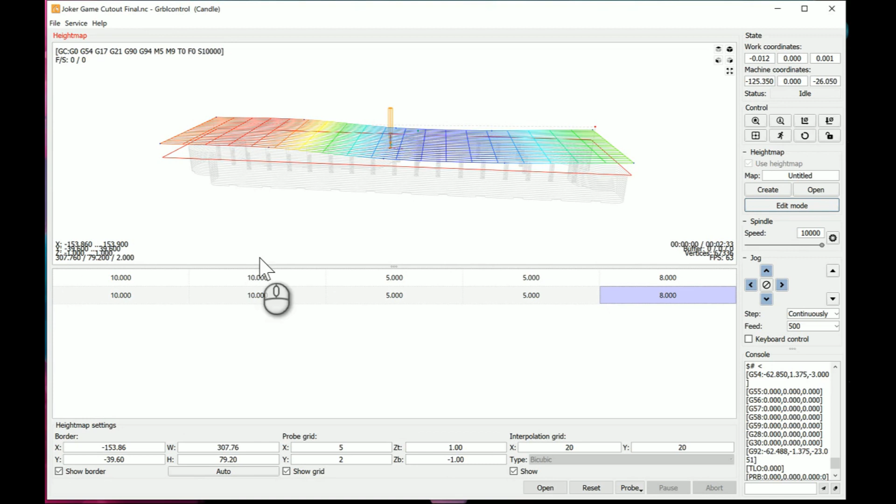So that comes in really handy for making more accurate cuts without having to resurface your entire spill board and cut a bunch of stuff like that. So then whenever you use that, you just go over here and use the Heightmap on whatever part you got, and you can also save it and use it for a later time, so you don't have to come back in here and do this every time. You can just open the file up and use it. You're good to go.

Alright guys, I think that does it for this video. I hope I help you guys out.